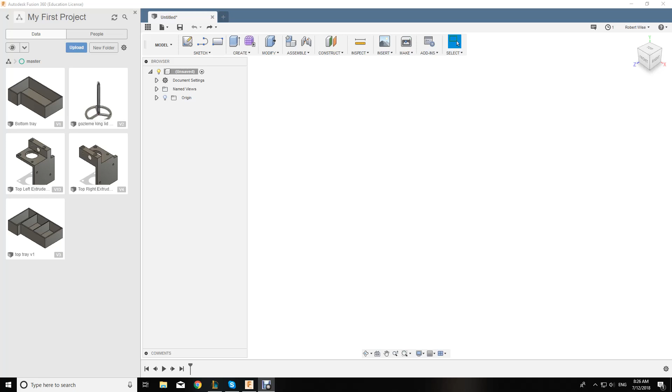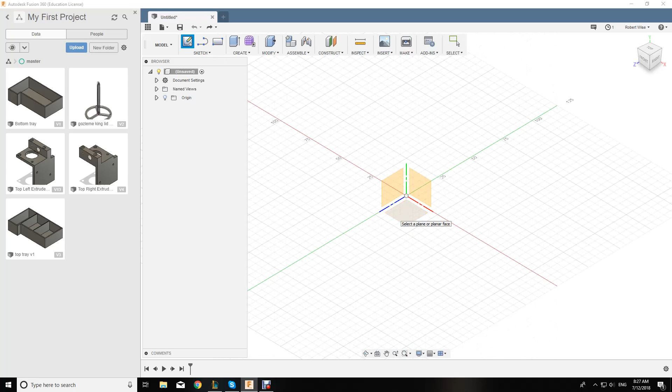So we'll start with a new sketch. You have to select a plane or a face to start your design, which is if you just want to do something flat in the bed, and this is where things start raising. You should already be aware of your X, Y, Z axis, so depending on what you need to do will depend on which you pick. We're going to start with the bottom of the face.

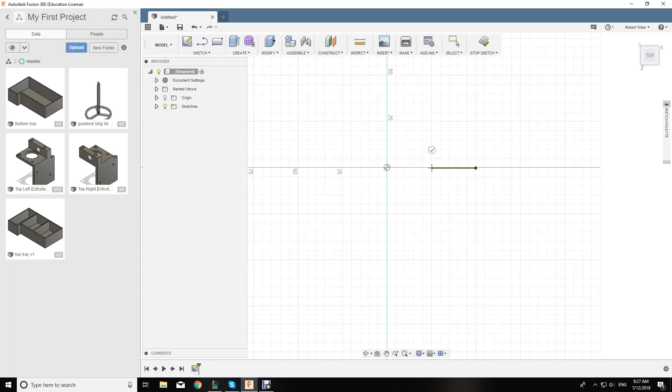I like to use a spline tool, a control point spline. It just makes it a little bit easier, well, I find it does. So I need a little bit of length in mind. This is actually going to be a vacuum cleaner part for my vacuum because it decided that it wanted to break.

Okay, so I'll tell you right now, this isn't going to let me do it. As you can see, it's a bit sharp up through the center part there, but we'll see how we go.

So if we go over to create and go to pipe, okay, so it did let me do it, which sometimes you'll find it won't allow you to create the pipe because the body would intersect itself or something, or it comes up with an error. It just means the curve is wrong and there's possibly too much curve.

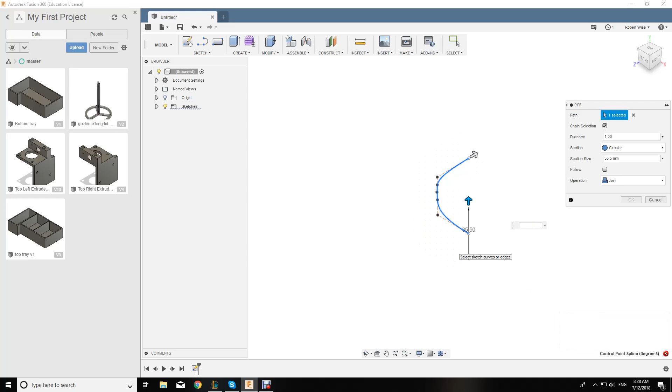Now I actually need my outside diameter to be 35.5. Now there you go, there's the error, see that? So if I go back to 30, it'll let me do it. Then if I go to 35, there you go, there's the error. Alright, so what we need to do is just play around in here a little bit.

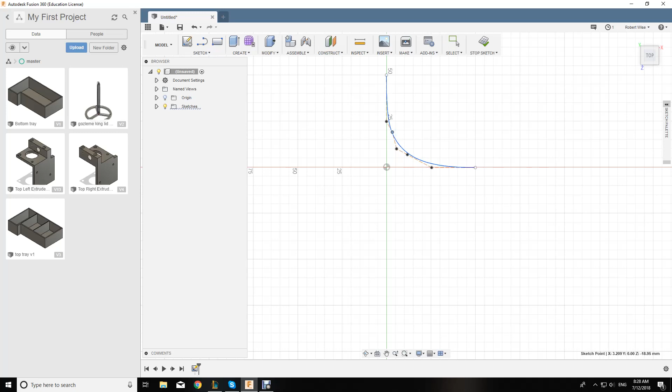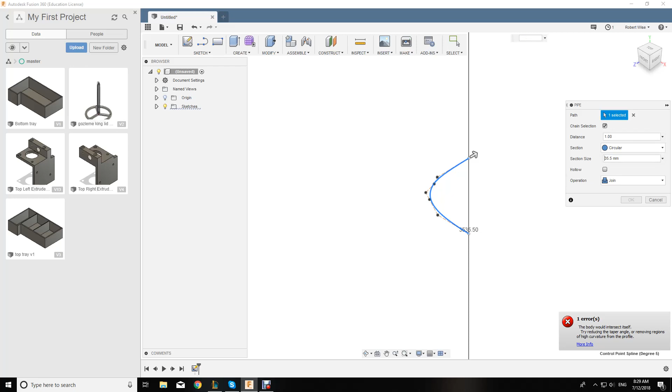So we're just going to curve this a little bit more and give that one a go. Let's go back to create pipe, select where we want to do it, and go to 35. There we go, it's going to be 35.5. And again, it's saying it doesn't want to let me do it, but that's because I selected 3,535 instead of 35.5. Let's try that again, there we go. So it helps if you select the right numbers.

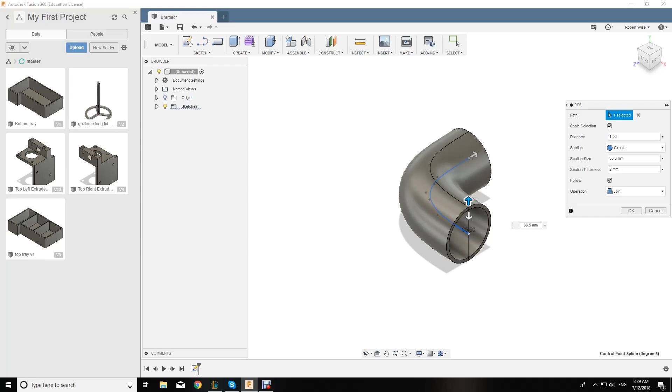Now I also want to make this hollow. As you can see at this present stage, it is solid. So we just select hollow, and then we can pick the thickness of the wall that we want. It's not the thickness of the hole itself, it's the wall. So I only need mine to be say 2 millimeters, and as you can see, we now have a piece of pipe. There we go, that's one angled pipe.

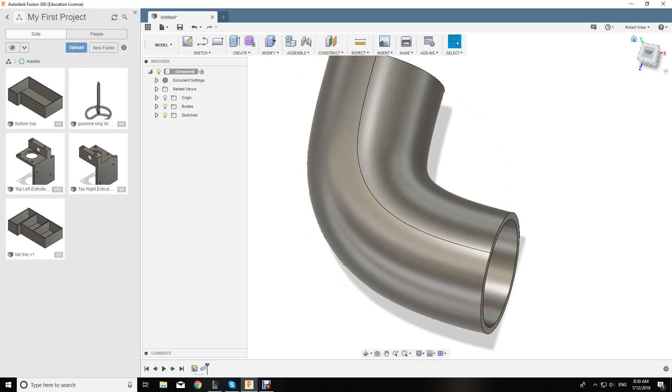So what I need to do now as well is I actually need it to step down. So I need the next piece to fit, obviously, to have the vacuum cleaning part, because that part will go straight into the head of the vacuum. Now I need it to fit the pipe. Now the issue is that it's only actually got an OD of 33.5 millimeters.

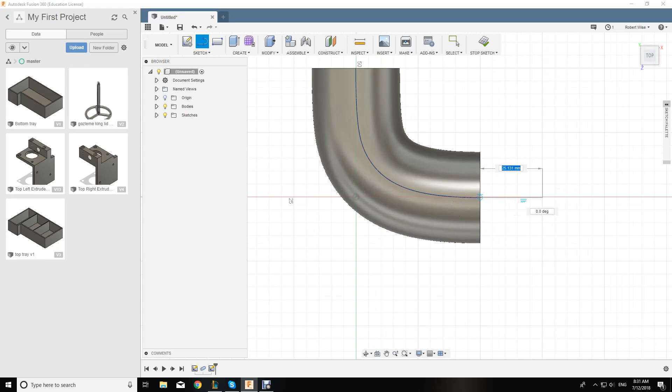So that would mean that I need it to step down in one part. So I'm kind of going to do something a little bit different here. If it lets me go home, let's just escape out of that. No, it's not going to let me. Okay, fine, so now we're going to do another sketch on the bottom. Zoom out a little bit so I can move my screen around. Alright, so we're going to start from here. I'm only going to come out, I don't know, we'll make it 20 mil.

And then I will go create pipe on that piece. Now it's instantly going to make the pipe exactly the same as the last pipe. Now, as you know, I don't need it to be as thick as what I originally made it, so I need it to drop down to, what was it, 30, sorry, I'm just taking a measurement. What did I need it to drop down to?

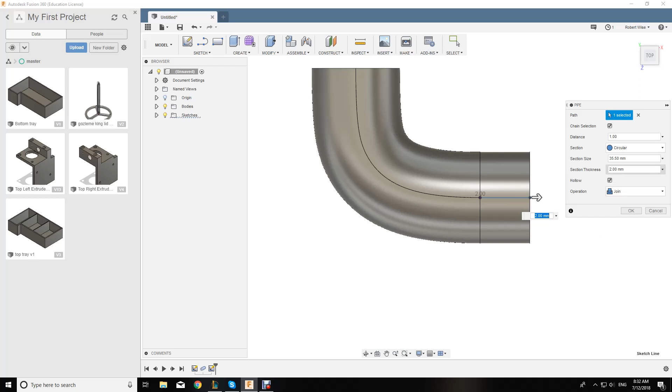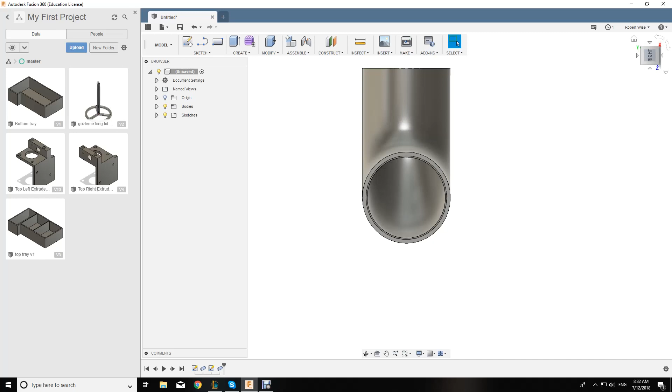34 actually, so I needed to drop down to 34. That would mean that I would need a wall of 1.5. So what that would mean now is the wall itself will actually step down due to the fact that I have changed it from obviously 2 mil, which would have dropped it down to 33.5. I've changed the wall to 1.5, which means it allows the slightly bigger pipe fitting to go into it.

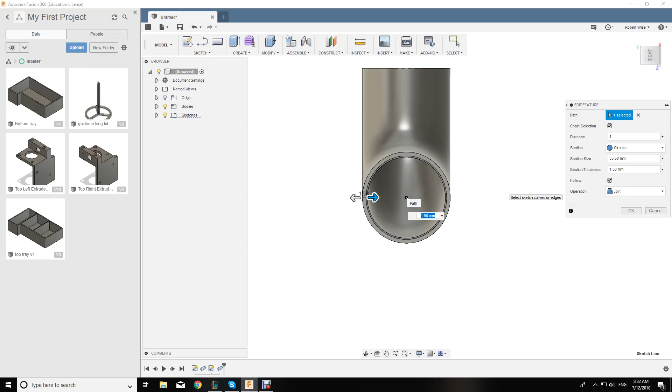So that is how you actually create a hollow bent tube, and as you can see, there it is there. If I was then to go make, we'll go 3D print, I select that. I am using Cura, as you can see my step in there, see that step? Wait for Cura to load up, takes a bit of time.

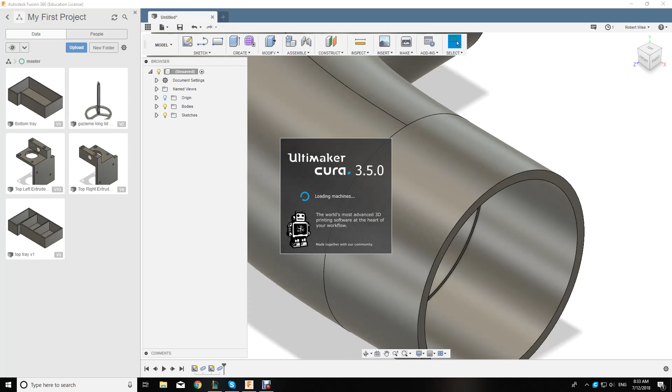Yeah, so you can actually see the step right there. So I know that it's worked, I know it's given me that little bit extra that I needed. Sorry, my Cura takes a little bit of time to load, doesn't seem to like it when I'm in Fusion.

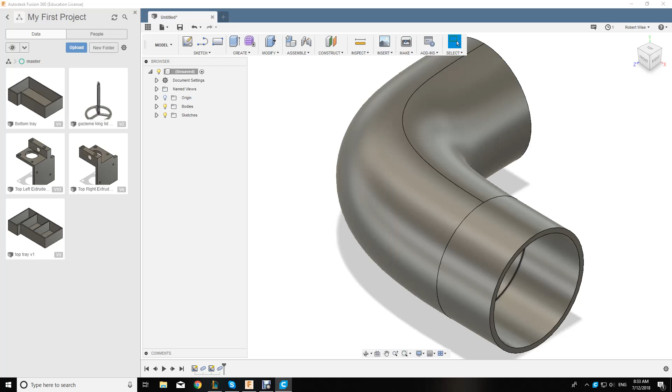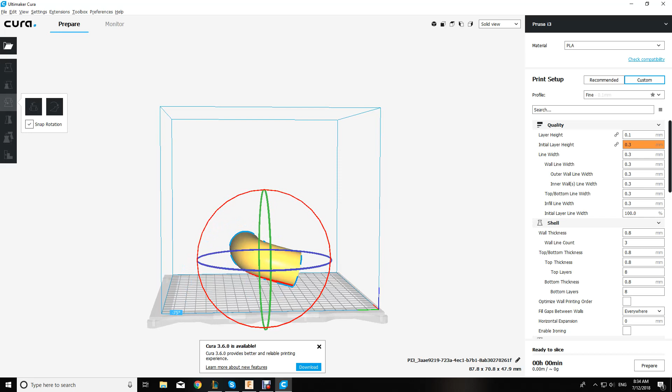Alright, just drag this one across, and there we now have my pipe. Now obviously I wouldn't actually print it in that way, I would actually rotate it. So just go 90 degrees, and that's how I would actually print it, like that. And there's the pipe, you can see the step in there.

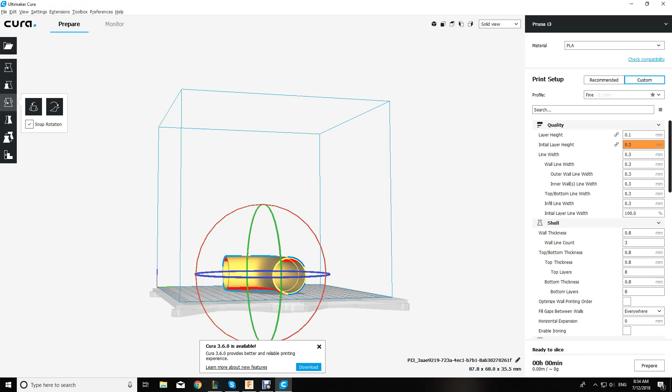There's things you can do to make it smoother in the step and everything like that, but that's just a quick, easy way. And also that means that my pipe will actually, when I insert my vacuum cleaner end, it will hit that part and not go any further, so it'll make it smooth once the vacuum cleaning pipe is inserted. And there we go, so nice, quick, easy tutorial.